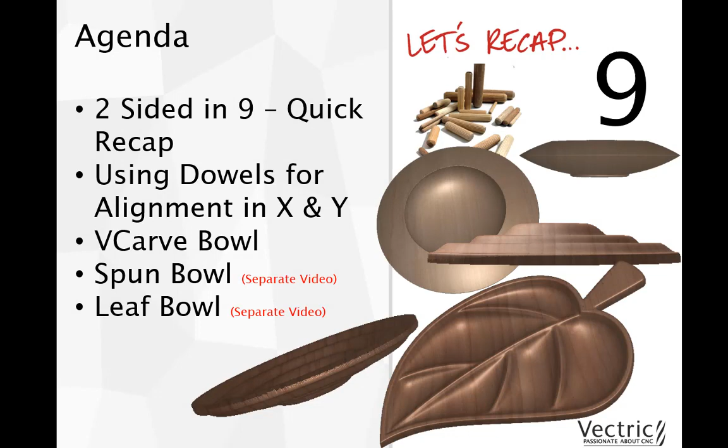So let's look at the important new features added to version 9 specific to two-sided machining. When you start a new session in the software, within your job setup form, you now have the option to select between a single-sided and a double-sided job. To create a two-sided part, you select double-sided, and then set up your job size as normal. The Z0 position can be selected for both sides within the job setup form.

As normal, we can set that from the material surface, the machine bed, or we could zero off the same side so we're referencing from the same face. Then we choose which way we'd like to flip our material over, so we can flip that from left to right, or we could flip that from bottom to top.

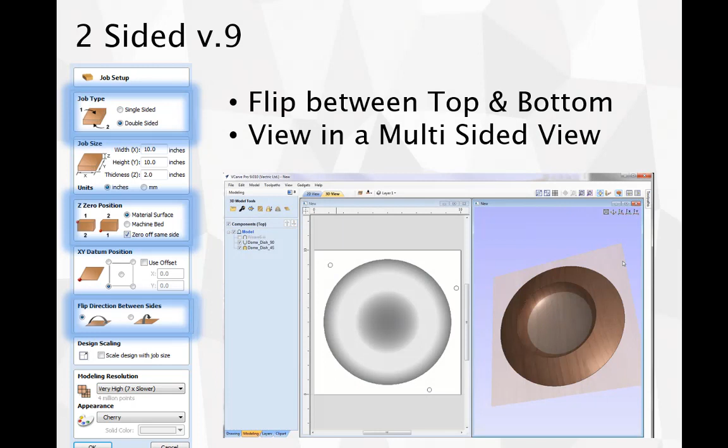Once we've entered all of the information within the job setup form, we'll then enter a new session, and it will look something like this. Here we have the option to switch between the top and the bottom, and if I click on that toggle button, you'll see that I'm now able to switch between the top and the bottom sides.

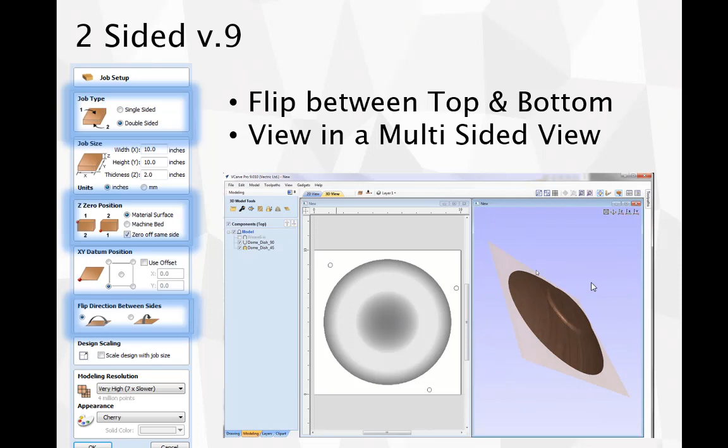In the 2D view, the bottom is represented with an orange ruler, so I know that I'm on the bottom side. We also have the option on the right hand side to visualize our part in a multi-sided view. When we click on this option, I'm able to view both the top and the bottom in the same session within the 3D view.

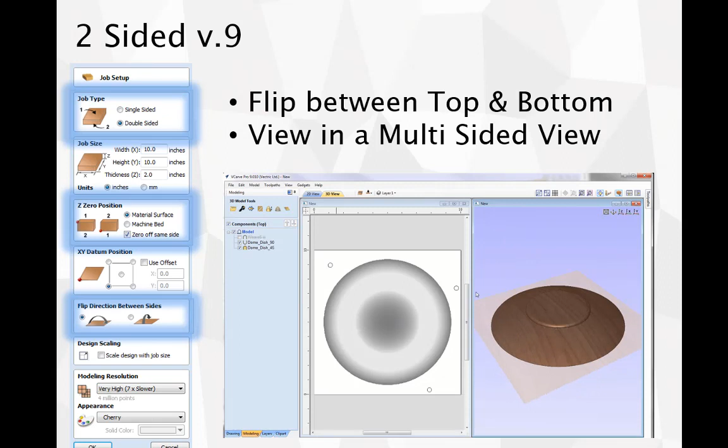So not only can I see the top and the bottom of components that I've assembled or modelled, but I'm also able to visualise the toolpath preview, both the top and bottom within the 3D view. Over in the 2D view, whilst we're in a multi-sided view, we're also able to visualise vectors that may be on the other side. All of this is very useful in that we're able to see everything that's going on both sides in one single session, so we're not left to do any guesswork.

All of this will be covered throughout the different examples we'll be looking at throughout this tutorial and the two separate bowls we'll look at separately. When creating a two-sided part, it's crucial that we have exact alignment between both sides in terms of their X and Y locations. There are many methods of doing this, but I'm going to go with a method I know is pretty fail-safe, and that's using dowel holes positioned in a random asymmetric manner.

So what do I mean? Let's say that you have your part in the job. You need to draw circles that are the same diameter as the dowels you plan to use, and then randomly position them around your part like so.

Then you're going to take your dowels and select all of them, where you'll use the right click option to copy to the other side. So when you flip the part over in the software to view the bottom side, you will see that the dowels have been positioned according to your flip direction that you set up in the job setup form.

And so there we have everything we need. We can begin to run the toolpaths. So your first operation here is to take the dowel vectors for the top side and partially cut into the top side of the material block.

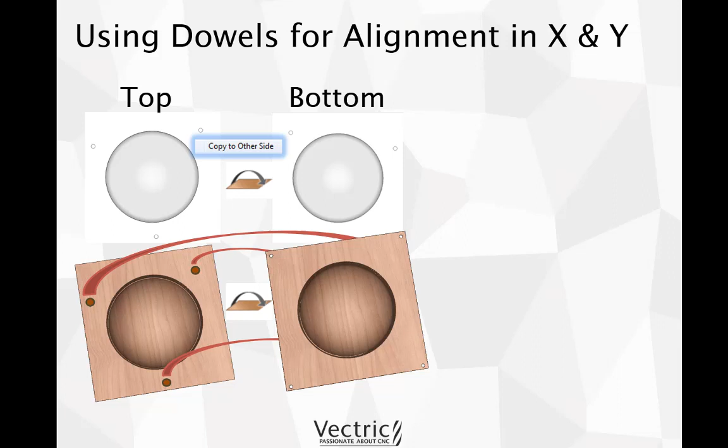So then we'd secure our part in place using screws or clamps, and then we'd simply run the other toolpaths for the bottom side. The benefits of using this asymmetrical dowel method means that I can cut our part in two separate operations, especially when we're dealing with 3D machining.

3D machining in a single-sided job can take quite a while to cut, and so having the ability to cut in two separate operations just makes life a little bit easier for me.

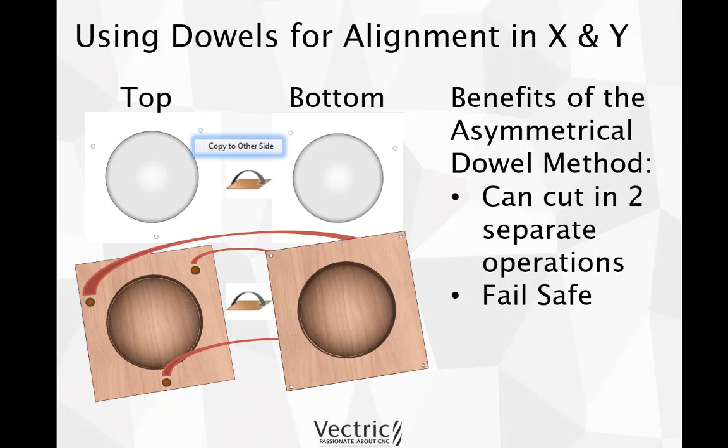It is also pretty fail-safe, as there's only one possible way that we could locate our part, so we don't get confused with which way we flipped our part over, whether that was in the horizontal or the vertical, as our asymmetrical random positioning of the dowels means there's only one way that we could ever locate the part.

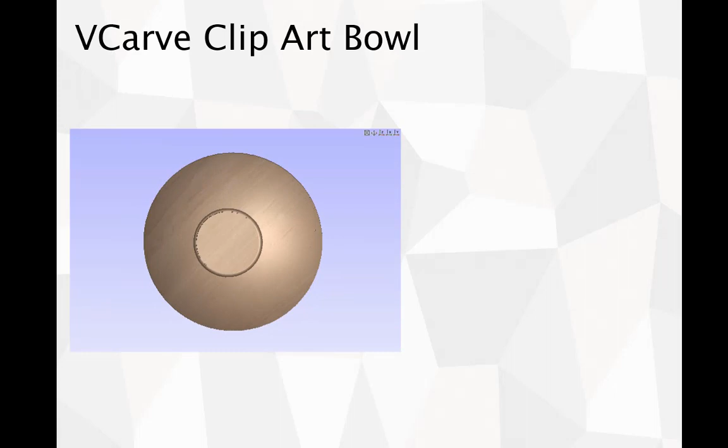So let's have a look at an example where we create a two-sided bowl in V-Carve. Here we're going to make use of the free Clipart that comes with V-Carve and assemble the Clipart to make a full 3D two-sided bowl that you can see here.

We'll look at how to add tabs to hold the bowl in place and run through the toolpaths to cut the part out. We'll then discuss how we could remove the cusping effect that may be left around the part due to the fact that we are using a round tool to finish the part, where only the centre of the tool will ever touch at 0.

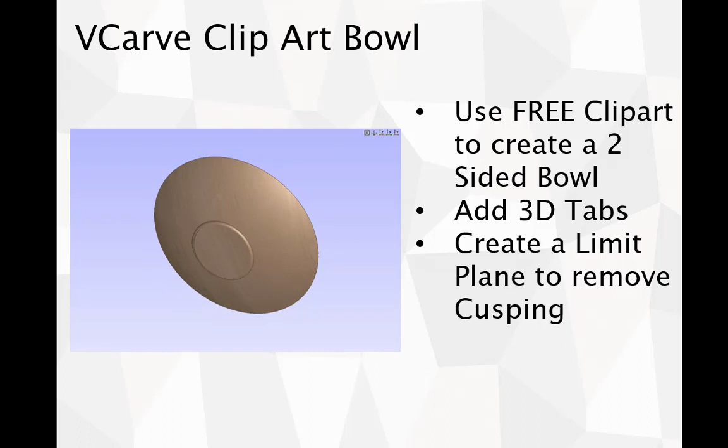And so we'll look at how we can create and utilise a limit plane with a negative base height to drop the finished tool below 0 to ensure that the cusping is removed. And then to finish, we're going to look at alternate designs.

So in the software, we're going to go and create a new file. Working with a double-sided job, here we're going to enter our job dimensions. Working with 10 inches for the width, height is going to be 10 inches, and our material thickness is 2 inches.

I'm going to set the Z0 position of the material surface for the top side. For the bottom side, I'd like to set our Z0 to the machine bed, so I'm going to zero off the same side, so we're referencing from the same face. XY datum position is in the lower left hand corner. We're going to flip that across the horizontal there, and then we could go ahead and press OK.

So I'm going to go straight to the modelling tab, just to organise my levels in advance. I'm just going to right click, rename that level. We're going to call this level the model level.

And then we're going to go into our Clipart tab, and I'm just going to locate my Clipart. So I'm looking at all of the Clipart that comes with VCarve here, and I've got a section here called domes and dishes. So here I've got a variety of different domes, all at different angles.

I'm going to take this one, 45-degree angle here, double click that to bring that into the centre of my job, and then I'm roughly just going to size that up. Okay, you might want to make that a little bit bigger.

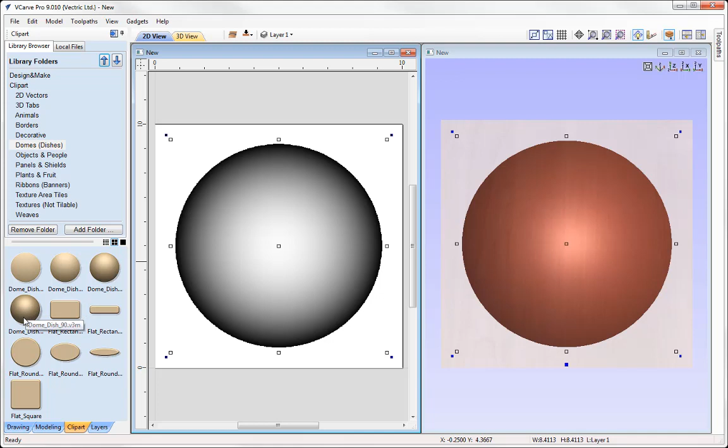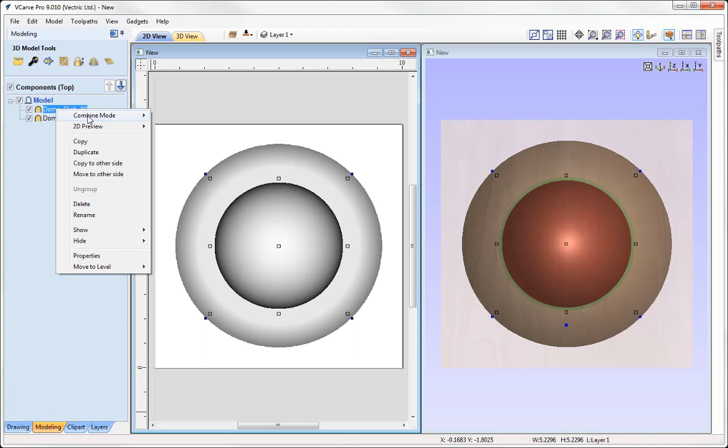We're going to look at this 90-degree dome dish. Let's double click on that. That's going to automatically put it into the center, and then we're just going to roughly position that. Okay, that might be a little too small. Something like that seems okay. If you go into the modeling tab, we're going to alter the combine mode of this component, setting it to subtract, so it's subtracting into our overall dome shape.

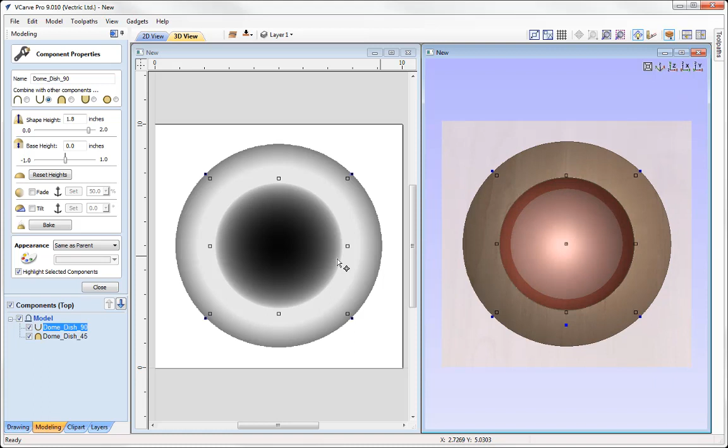With that component selected, let's go into the properties. I'm going to reduce this - it's a little too deep at the moment, so I'm going to set that to be 1.8. Press the space bar to enter that in, and we can see that has applied there. We'll just put that in the Z, and then close out of the dome dish properties. That is pretty much the model complete.

So what we need to do now is position our dowel vectors. If we go into the drawing tab, we're going to draw a circle using the quick keys. I'm going to drag to begin drawing a circle - I've measured my dowels and they are 0.33 of an inch. So I'm going to type in 0.33 and then D on the keyboard for diameter, and it'll instantly create that for me. Position there, and now that I've entered that in, the form has already updated, so I can just go around and click in position for the other dowels.

Okay, so that's okay. We can close that down, and we've got our dowels in place - that's pretty much the top side done. Now I want to take a copy of the larger dome that we've used for the top side of the bowl and send that over to the other side. I also need to send a copy of our dowels over to the other side also.

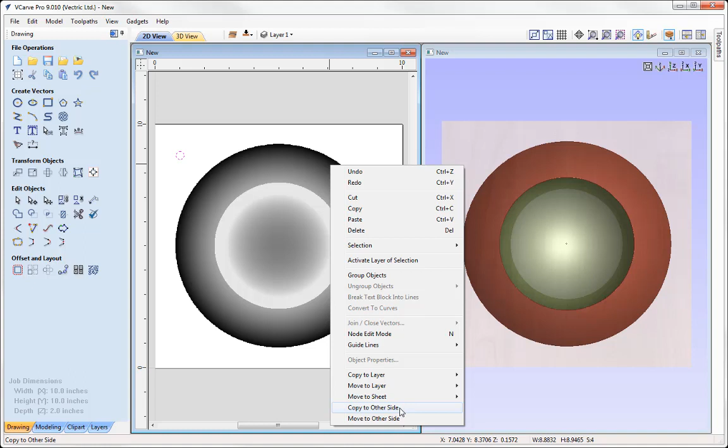So with that selected, I'm going to hold down Shift to select the other two dowels, and with Shift still held down, select the larger of the two domes. Then we're going to right mouse click and use this option to copy to the other side. That's going to send those vectors along with that component over to the bottom side. Now when I come over to toggle between the top and bottom, if I click on that, I can see we're now on the bottom because my ruler is displayed as orange, with an arrow pointing at the bottom side of my material block.

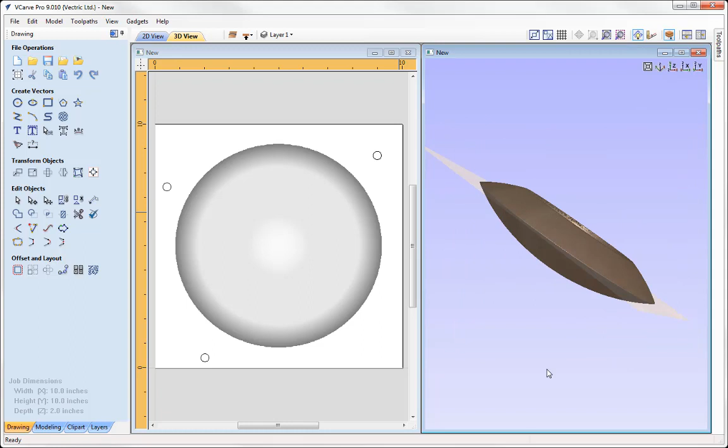I can see my dowel positions have been mirrored over, and I have my component there. We are looking at this in a multi-sided view, so when I come into the 3D view, I can see the whole part, and everything is aligned correctly - that's because the software has done that for me when we copied everything over to the other side, based on the flip direction going from left to right. So let's just put that in Z.

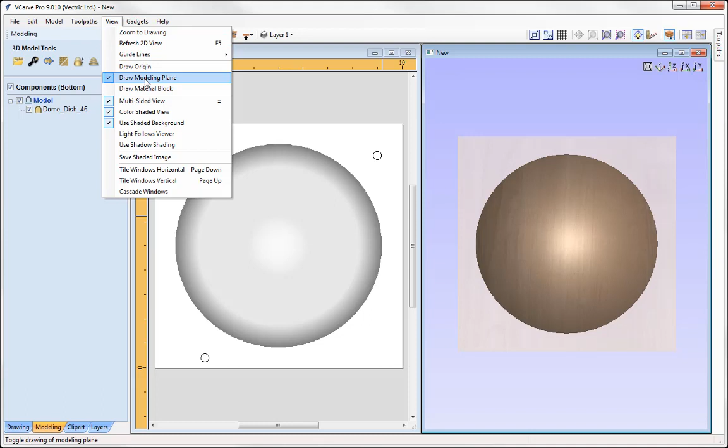Let's go into the modeling tab again to keep organized. I'm going to right click and rename that level - we're going to call this level model. If we take a look at our model, if I just go to view and temporarily draw that modeling plane so we could visualize our part as if it was actually sat on, say, a countertop, we'd see that our bowl will just constantly be wobbling around because it has no flat bottom.

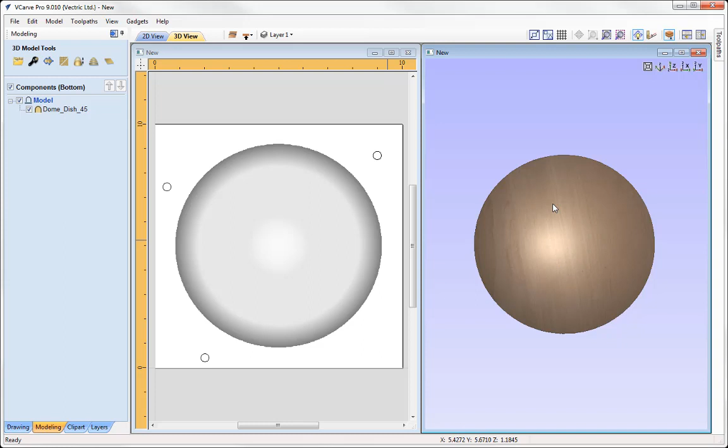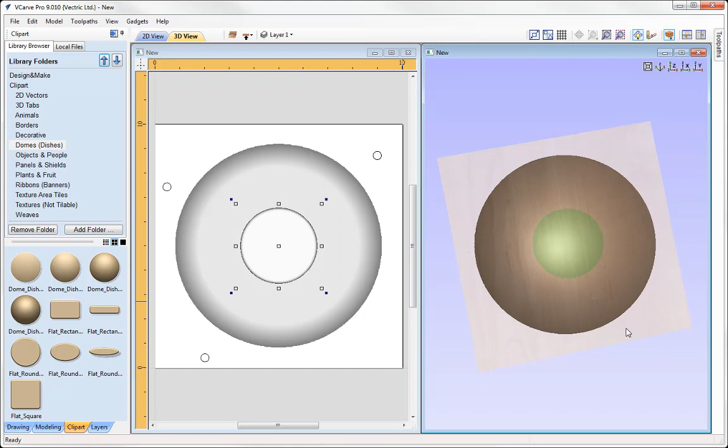So I need to implement something that's going to have a flat area in the bottom side of our bowl. To do that, let's go back into our Clipart tab - we can see here that I have a flat round circle within the domes and dishes section. I want to double click to bring that in, and it will again put that into the center. Just going to make that a little bit smaller, like so. We can see it's currently being obscured by the height of the big underside dome of our bowl here, so what we need to do is just look at the properties there.

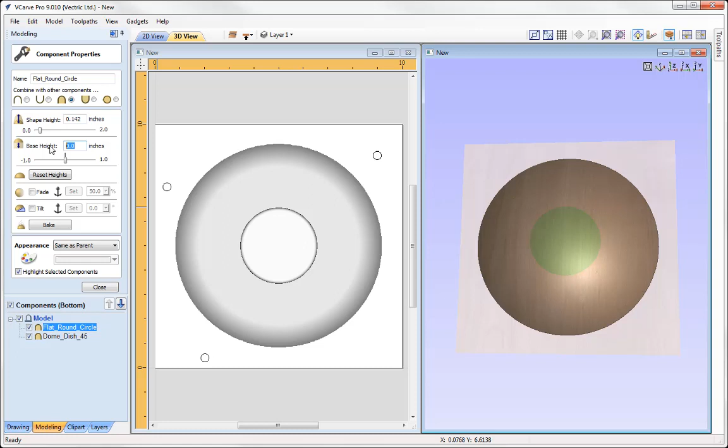So with that component selected, go into the properties and we're just going to adjust the base height. If I run my cursor over this area, I can see it's currently at 0.0. Let's have a look if we add in a base height of 1 inch, press enter to enter that in. We can see that's just about coming through, so let's try 1.2.

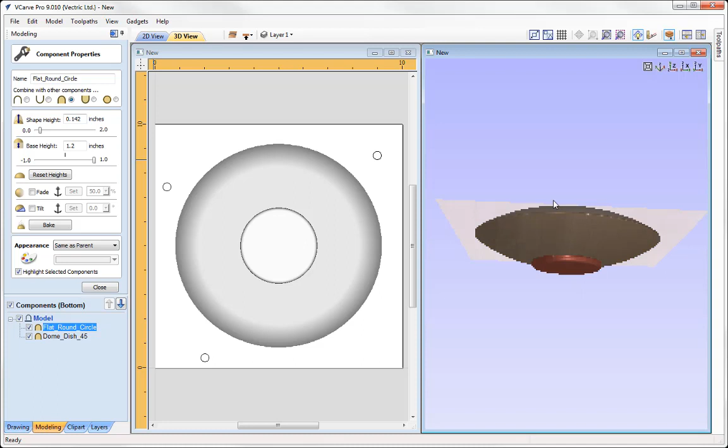And there we have a nice flat bottom there. So now when my bowl is sat down on a side, it's just going to sit nice and flat thanks to this flat bottom that we've just added.

So we're almost ready to go to the toolpath side of things. Before we do that, we need to ensure that our bowl is going to be held securely to our material whilst we're cutting both sides. And so to do that, we're going to look at adding in 3D tabs.

Let's go over to our component tree. I'm going to right click on the model level and insert a new level. Right click on that level, we're going to rename this one to tabs. Then we're going to right click and set the combine mode of this to merge, so any tabs that I add into this level will blend in with the actual composite model that we've got here.

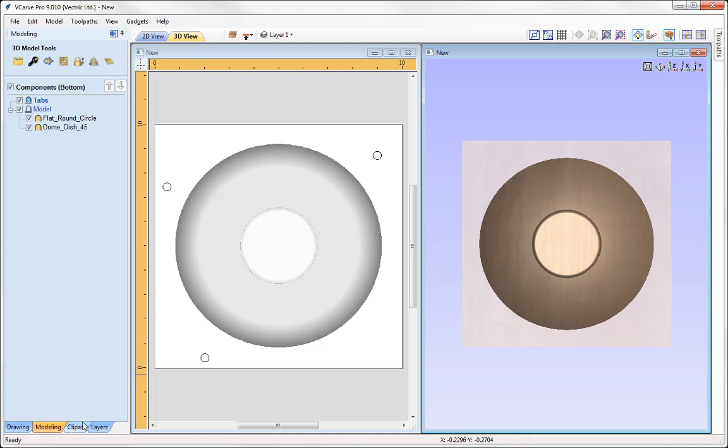Let's go to our Clipart tab. We have a folder dedicated for 3D tabs. You'll see we've got 3 new pieces of clipart, and we've got this underscore rectangular one. I'm going to double click that to bring it in, so it's just a rectangular tab.

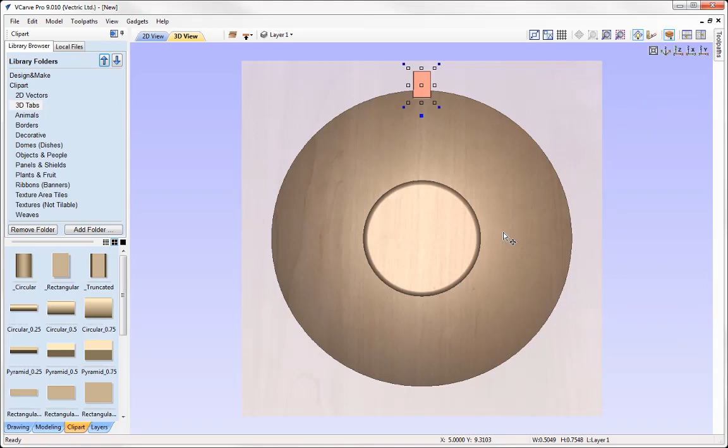I position that along the centre at the top there, and if we go into the 3D view, we can see that tab. We can check the height of that, a quarter inch. That seems pretty reasonable in this case. I'm just going to drop that down a little. Okay, that's okay. So now we could look at adding more tabs.

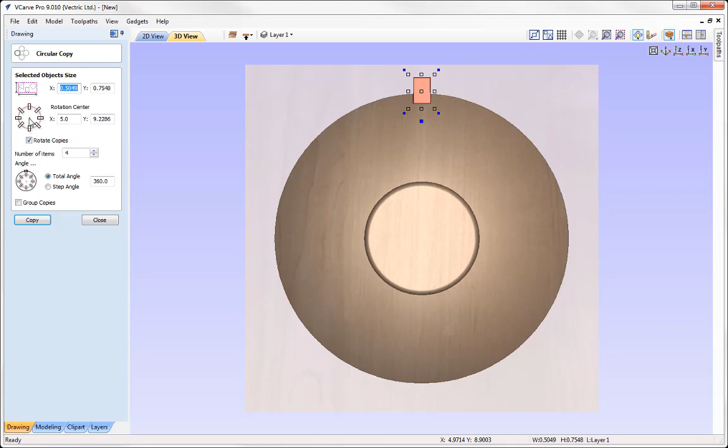I could just go in and position them, or I could just let the software do that for me by selecting that component there, and then we're going to go into the drawing tab. I'm going to use the circular copy tool. We're going to make sure that our rotation center is in the center of our job. If we take a look, when I double click on the center here, you'll see that rotation center has been pulled up to the center of our job, and our part will be rotated about this point.

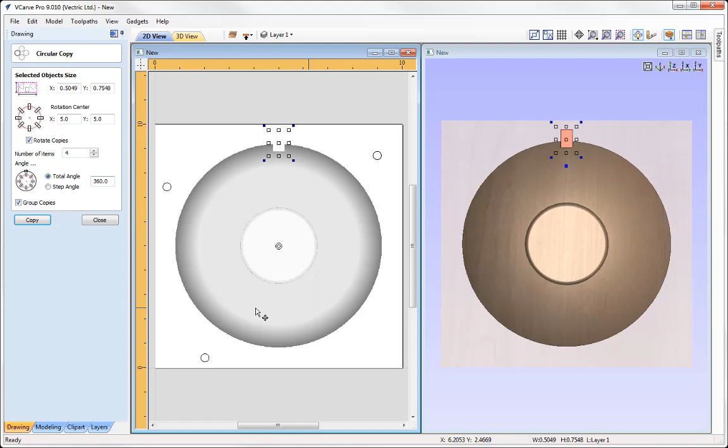We want 4 copies, and we want to rotate those copies, and then we'll group them once we've created those copies. So let's press copy, and there are the 3 other tabs that have been positioned around the outside of our bowl. If we go into the Modeling tab, we can see that they've been grouped because we chose to do so in that form.

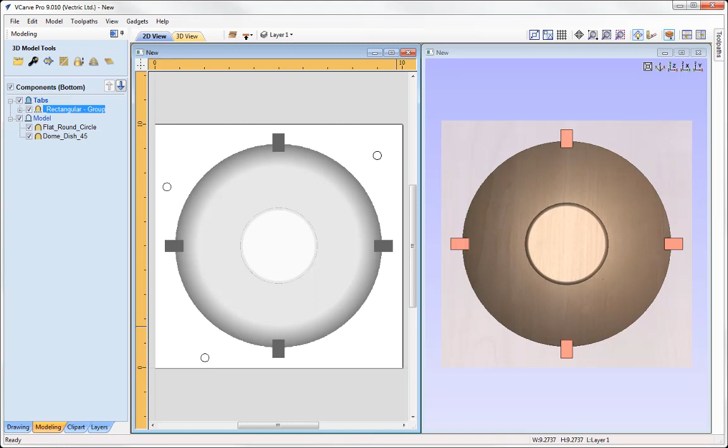So now we have everything set up ready for us to run our toolpaths. Let's switch back to the top side, and then we're just going to switch over to the Toolpaths tab. So first and most important, we want to go into our material setup.

So here we just want to check over a few things. Material thickness is 2 inches, XY datum position is going to be set to the lower left hand corner. We're going to set the Z0 on the material surface for the top side. Model position in the material - you can see we currently have an error in that our model thickness actually exceeds our material thickness. So we're just going to tweak that.

I do have a little bit of room just to shrink that down, and I'm sure it won't cause too much of a change in terms of the way that our bowl looks. So let's use the set option there. Here I'm just going to go for 1.8, press apply, and then we'll just simply close that down, and it's been updated there.

And then I'm going to position the model in the material so it's in the dead center of our material. That way we have material above and below, so this can just account for any discrepancies in the actual thickness of our material there.

Check over your rapid Z gaps above the material, clearance plunge, and your home and start position, and then once I'm happy with everything, I'll press OK. And so your first operation here is to take the vectors that represent the dowel holes.

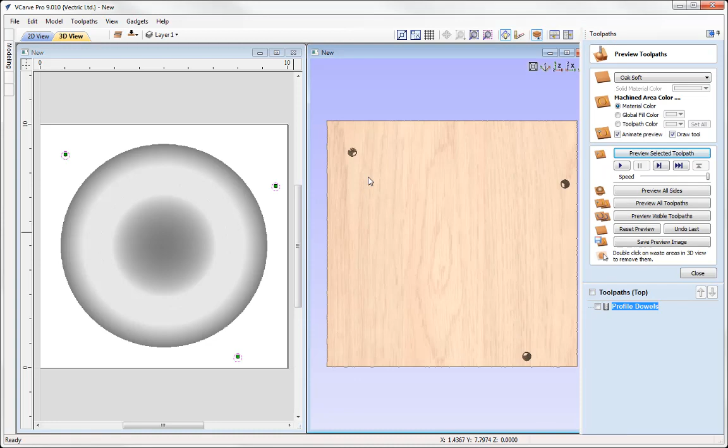I'm going to go into the profile toolpath. We're going to cut partially into the top of our material block, with a start depth at 0, the top of the block, and cut down 3/4 inch into the material. I'll use a 1/4 inch end mill, select it, press OK, and machine on the inside of those vectors. We'll call that one Profile Dowels. Simply press calculate, preview that, and we can see those dowels in position there. Okay, let's close that down.

Now we're going to look at our 3D toolpaths. We're going to go into the 3D roughing toolpath here, using the 1/4 inch end mill. You can use the edit option just to check over the settings, ensuring that they're safe and appropriate.

Then we move on to the machining limit boundary. In this case, I'm going to select the model boundary, so the tool will look at the model it can see and use that as its boundary to define the roughing toolpath. I'll put a little offset in there, same diameter as the tool, so it comes past the edge of the part by 1/4 inch. Machine allowance will go with 0.03, so just a tiny bit of skin will be left on our part for our finish tool to come out and finish that up.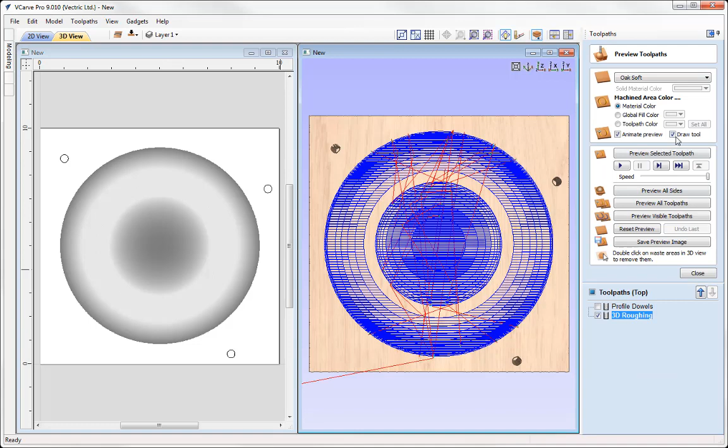Roughing strategy, we're just going to do a basic Z-level strategy where we raster in the X-axis, and we'll call that one 3D roughing. Press calculate, the software will calculate that for us, and then we can preview that part and see all of those steps there. Okay, so that looks pretty good.

So we've hogged out all of the large parts, and now we could use a smaller tool to get in at all of the finer, smooth detail that we can see here. So let's go into the 3D finishing toolpath.

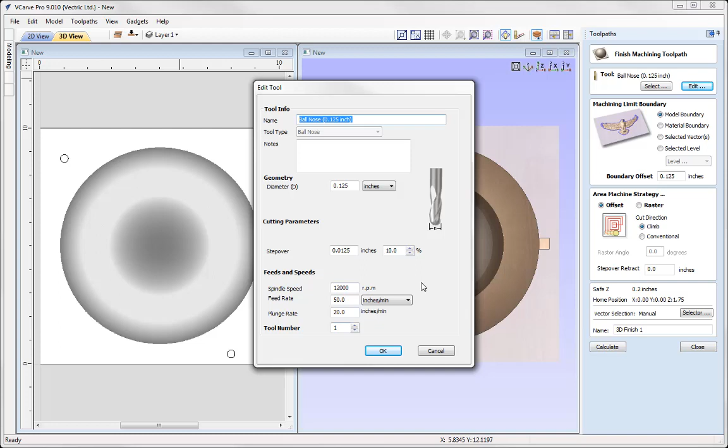Here we're going to use an 1/8 inch ball nose. I'm going to use the edit options to check over the settings there. Okay, step over of 8 to 10% seems reasonable. Go ahead and press OK.

And here again we're going to go with the model boundary. I'm going to go with an offset, using the same diameter as the tool. I'll apply an offset strategy as it's a rounded shape, going round and then moving on to the next contour and going round again. As I'm using that offset strategy, I'm going to help myself by adding a step over retract of 0.02, which will help eliminate tool markings as the tool travels from one contour to another. The tool will actually lift, travel to the next contour, and drop down, so it won't create the tool marking line you commonly see when using the offset tool on rounded parts.

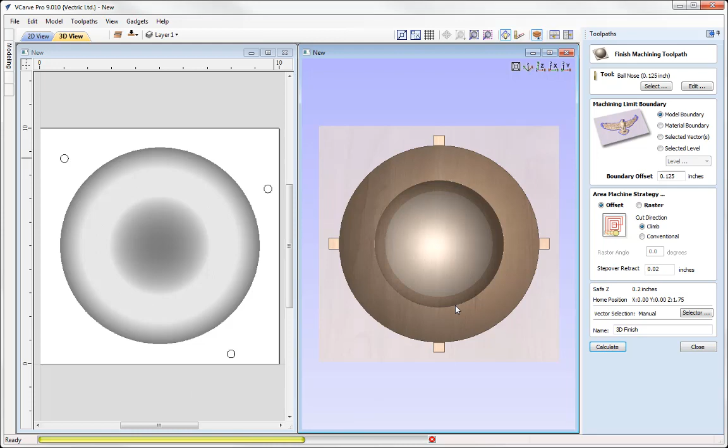So here we're going to give that a name, we'll call that one 3D finish, and then simply press calculate, and the software will take a moment to calculate that for us. Then we can preview that in the preview toolpaths form. Perfect. Okay, so I like what we've got there. We've got a nice dish in there, and we can see how our part would look if we cut that out on our CNC machine.

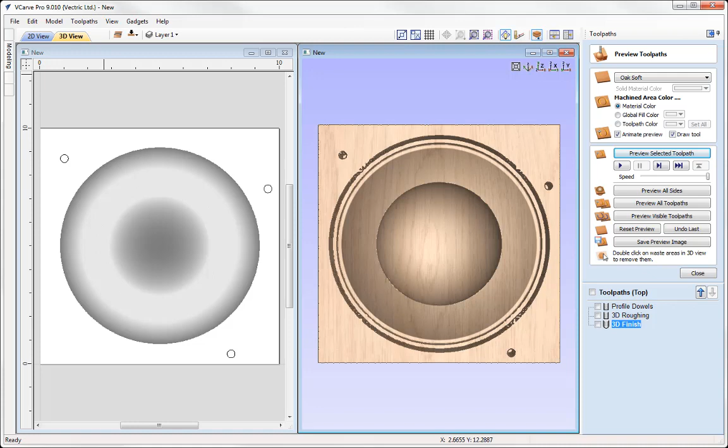So now we can switch over to the bottom side. Let's come over here, close out of the toolpath preview, and go to the bottom side, where you'll see now that we can enter in toolpaths for the bottom side. So as always, let's just have a glance over our material setup.

I can see straight away that our Z0 has changed, and it's now zeroing off the machine bed, because I set that up to do so in the job setup form right at the start of our job, which ensures that I'm referencing from the same face that we've just cut from. Okay, so we've got thickness, XY looks correct, model position is still in the centre there, perfect, and everything else looks okay here, just checking over to ensure everything looks correct.

For our first operation we're going to take those dowel holes. What we would have done is take our material block off of our machine bed, and now our first operation here is to run the dowel holes for the bottom side directly into the spoil board so that we can create location holes for when we flip our material over to ensure correct alignment within our X and Y positions.

With those vectors we're going to go into the profile toolpath form. The start depth for this, I'm actually going to enter our material thickness, so the tool drops down by the thickness of our material, reaching the spoil board, and then we can cut into the spoil board by 1/4 inch this time. We'll use a 1/4 inch end mill, machining on the inside.

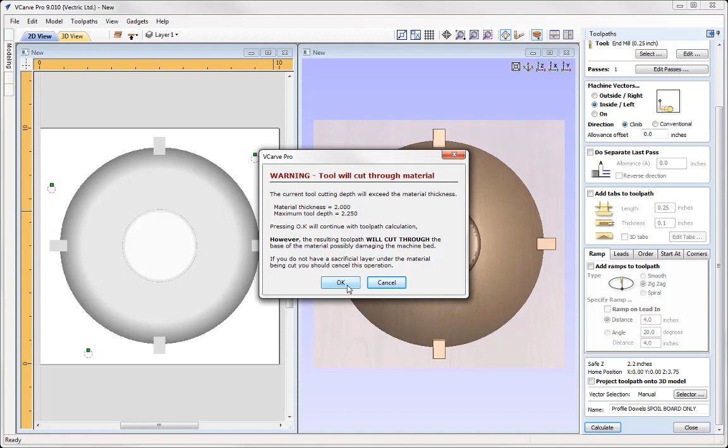We'll give that a name - we're going to call this one profile dowels, and just to remind myself, spoil board only, so we're not cutting into our material block here. Press calculate. The software is going to warn me that we will cut through our material - that's okay, that's what I intend to do, so I'll go ahead and press OK.

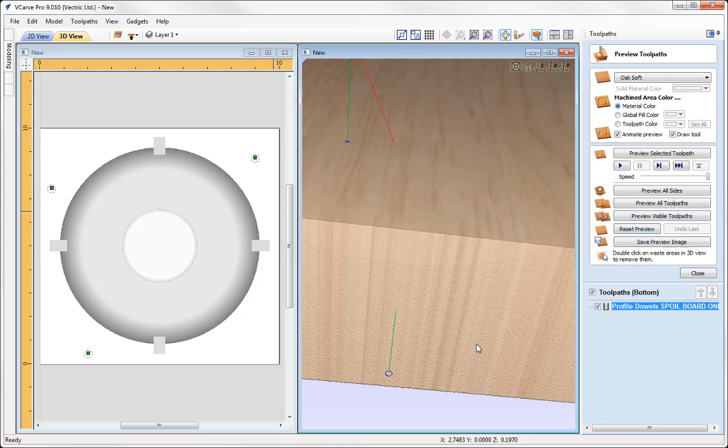Just so you can see what's happening here, the tool is coming over. It's going to drop down to 2 inches, which is the material thickness, though we won't have our material thickness in place there, and then it's just going to cut in 1/4 of an inch. We're not actually going to preview that because we're not cutting into our material block - this will be cut into our spoil board. Let's close that down, and then we'll just undraw the visibility of the profile dowels toolpath.

Now we can look at running our 3D toolpaths. Let's go into the 3D roughing toolpath. Here again we're going to use a 1/4 inch end mill. For the machining limit boundary, we're not actually going to select the model boundary this time - if we did that, let's just take a look.

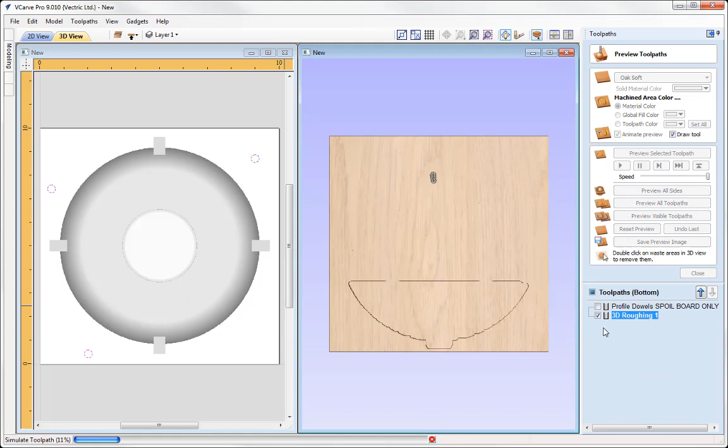So just calculate that and then preview that - you'll see that we'll actually cut our tabs out of our material block. We don't want to do that. We need to keep our tabs intact to our material block to hold our bowl in place. So let's just use the undo last option.

I'm going to go back into the roughing toolpath, and this time we're going to look at using the selected level. If I just open up the modelling tab over on the left here, you'll see we have a level called model that has our bowl in place, and then we've got a level called tabs. So what we can do here is specify to use this selected level - we want to use the model level as our boundary. It's going to take all the components within this level and use those components as the boundary for our toolpath.

What it also does is accommodate any models that lie within that boundary, so for instance it will include the tabs that we've got here, and that will ensure that we don't cut the tabs away. Using the selected level for the model, these components here, we'll put in an offset so it cuts past the part by 1/4 of an inch - you're going to see the toolpath cut past the bowl by 1/4 inch, so we'll see quite a bit of our tab sticking out there before it goes into our block of material.

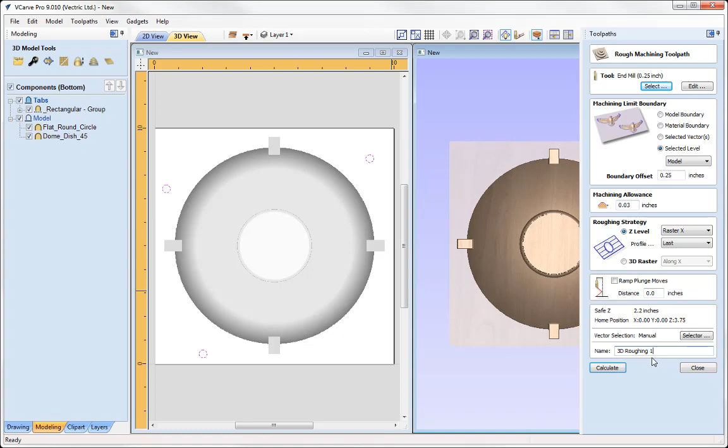Machine allowance 0.03, and we'll do a Z-level strategy. We'll call this one 3D roughing and press calculate, and we'll just move that over so we can see it, and then we can preview that toolpath - you can see straight away that our tabs are still connected to our block of material thanks to the option to use the level as our machine boundary.

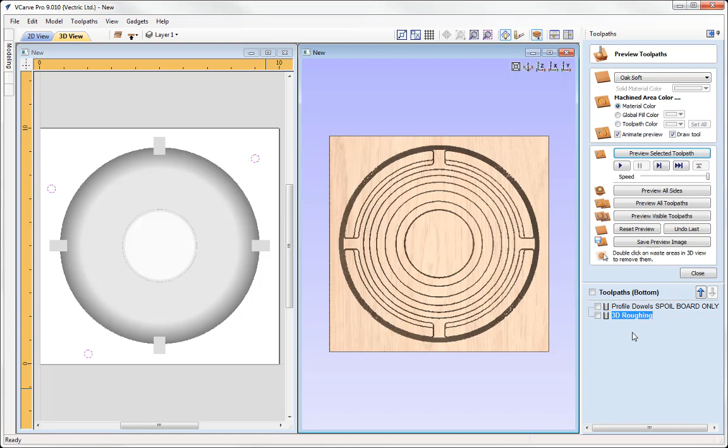Perfect, so let's close that down. We're going to go into the 3D finish pass. We use an 1/8 inch ball nose in this case. Again, we're going to use the selected level, the model level, with an offset so it rolls past the part, and use an offset strategy, and again we'd like to apply a step over retract of 0.02. Call that 3D finish, press calculate.

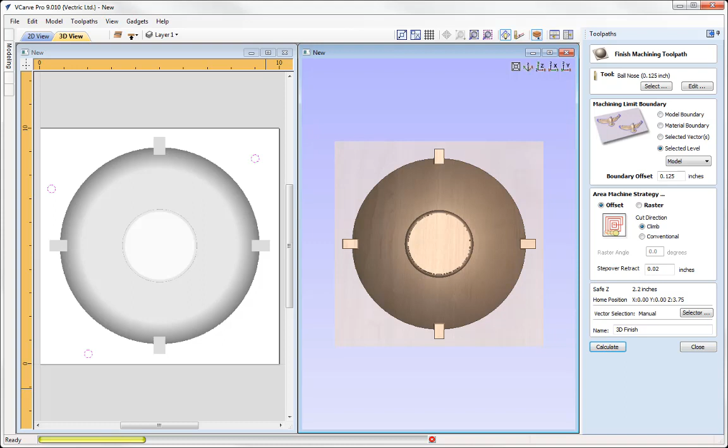It's just going to take a moment to calculate that for us, and then it will open up the preview toolpath form. We can preview that toolpath and see the result of that finished pass, and we can see our tabs are still held securely into our block of material so the bowl won't fall out.

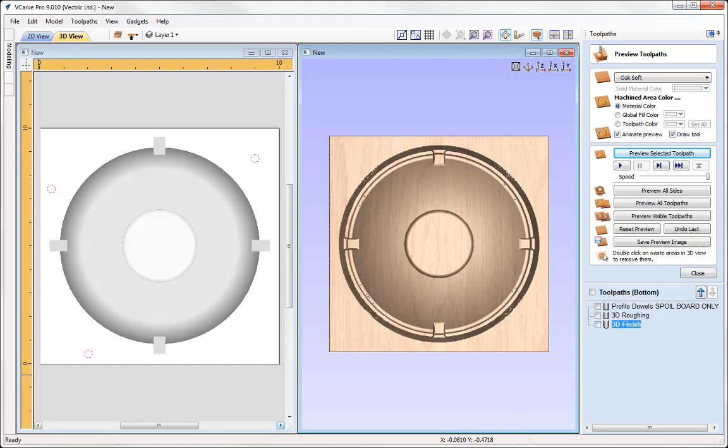Let's maximize the 3D view and take a look at our part so we can see the two sides. We can see we're not actually cutting all the way through, and what we're actually seeing here is the result of using a rounded tool to cut our part out, and only the center of this rounded tool will ever reach zero.

So we're left with what we call this cusping effect, or a seam that you'll be presented with around your part. To eliminate that, we could look at applying a limit plane where we drop the tool down past zero to ensure that we cut away the cusping.

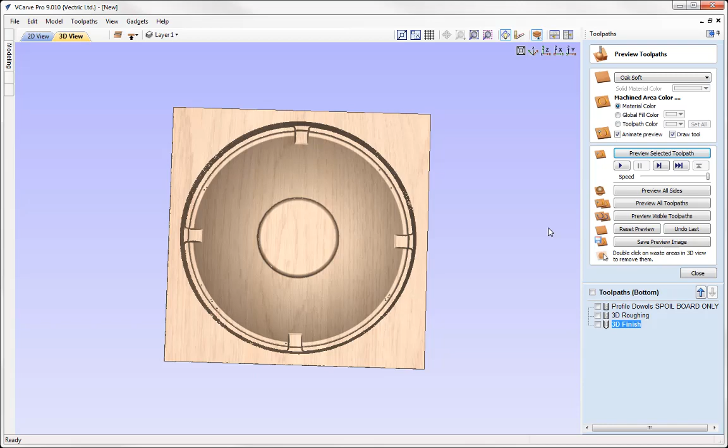Let's put that in Z, and we're going to switch back over to our modelling tab here. Within the model level, I'm going to right click to insert a new level, right click to rename that level, and call this one Limit Plane. I'm going to set the combine mode of this to merge.

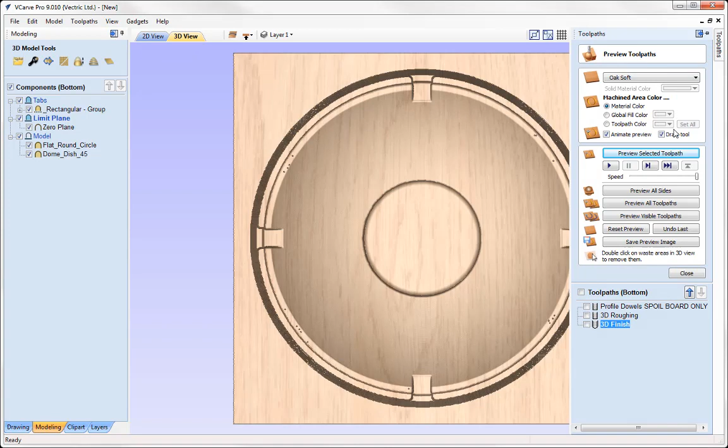So go to the combine mode, set it to merge, and then I'm going to create a zero plane that's going to sit there. Quickly coming over to the toolpaths, I'll close out of the toolpath preview. Then with our zero plane in place, I'm going to go into the properties and look at the base height.

Here I'm just going to drop the base height down by, say, the diameter of the ball nose that I'm using, so 1/8 of an inch there. And we'll close that down.

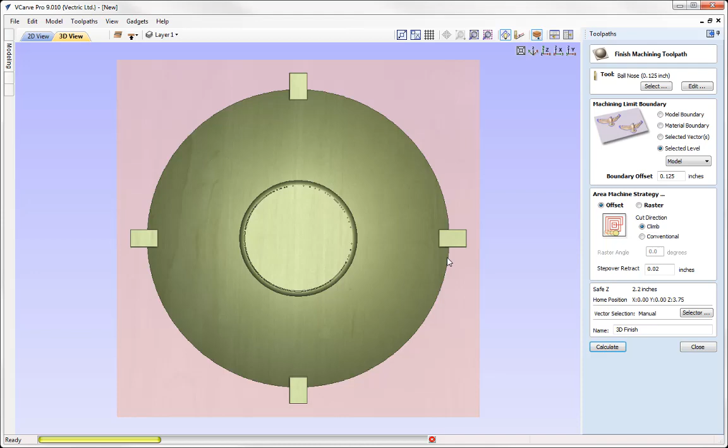Okay, so now that we've got a zero plane that goes below zero, when I recalculate my finish pass, it will accommodate that new plane and the tool will drop down past zero by 1/8 of an inch, and we should see that we actually cut through there.

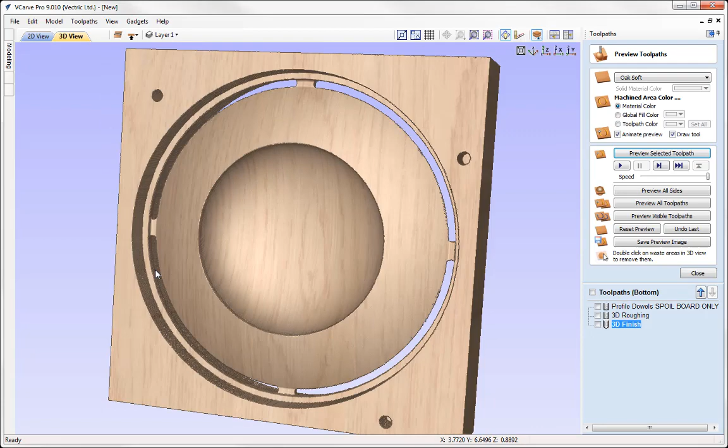So if we preview that, you can see we're actually cutting through our part, and that will eliminate the cusping effect that we may have on the edge of our two-sided part. And there is our finished bowl. So let's just put that back in the Z view.

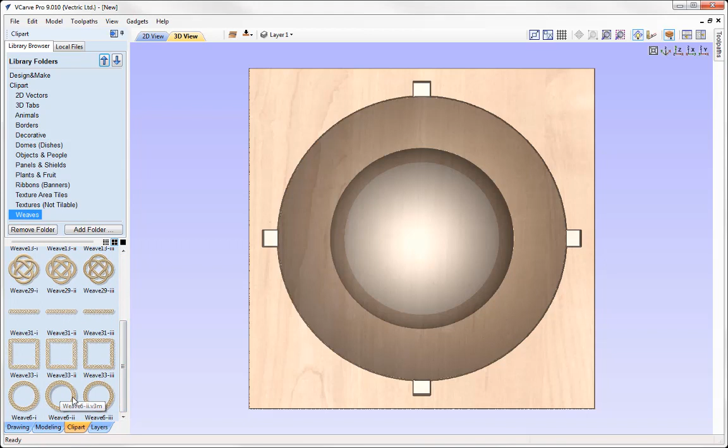So what we've created there is quite a basic bowl using the Clipart that comes with the software. We could look at alternate designs for our bowl. For example, we go to our Clipart tab on the bottom, and we could go into the decorative section or even the weave section, and here you can see I've got a series of circular weaves.

I could double click on one of those, and that will bring that into the center, and I could just bring that out into the modeling tab. I'll set the combine mode of that to add, and there we have a nice woven pattern that we could then go ahead and recalculate our toolpaths to include.

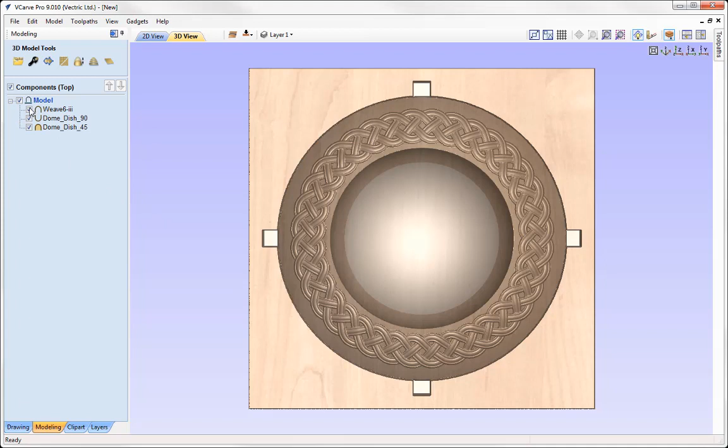So that's one idea. Another idea is to look at applying a texture toolpath to the rim or the edge of the top surface of our bowl. So let's have a look at a technique that will enable us to use a texture toolpath to go around the edge rim of our bowl.

So I'm going to tile our windows. I'm going to go into the drawing tab and draw a circle. I'm going to find the centre point of my job, and just roughly sketch in a circle. Just click on the actual grayscale so I can see where that is.

Okay, that's not too bad. I might make that a little bit bigger. We're just going to bring that out, and then simply offset that outwards by 1/8 of an inch, using the select new option every time. I'm just going to offset that out so it covers the majority of the rim there.

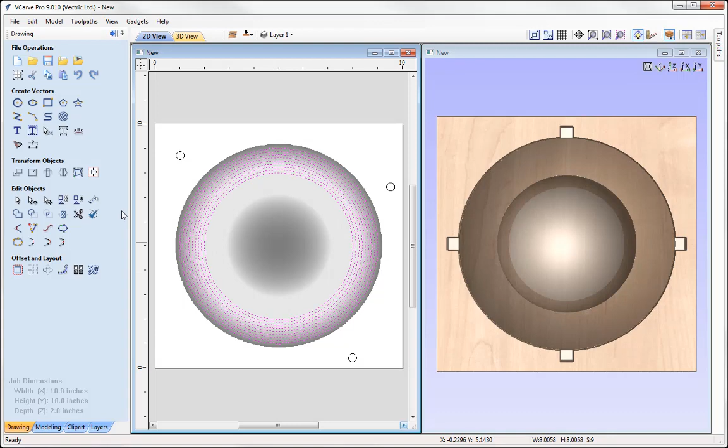Perfect, so let's close that down and take all of those vectors and go back over to the toolpaths tab.

I'm going to go into the texturing toolpath. Here we're going to select our ball nose, going with an 1/8 inch ball nose. Could use a V-bit if I wanted to. I'm going to use the selected vectors as a pattern and just go with some random settings here.

Max cut depth of 0.2, minimum depth of 0.1. And I'm going to make sure that I project that toolpath onto our 3D model there so it follows the contours of the actual bowl.

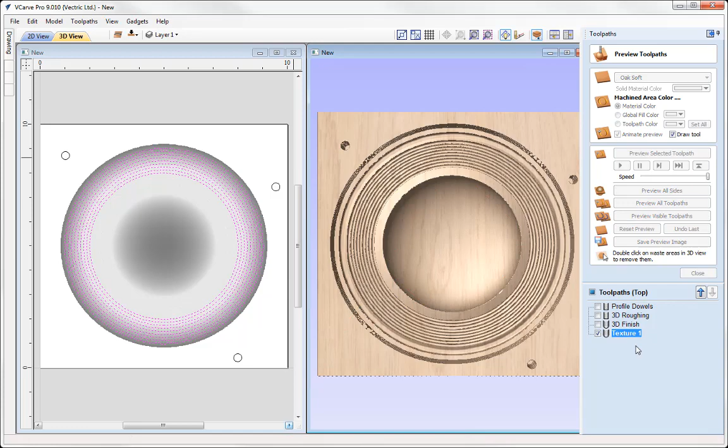I could go ahead and calculate that, and then we could preview that toolpath, and we can see that we've just got a very basic part there. It doesn't look too bad. It's not really the effect that I was after, but it does look quite nice, and I could go ahead and cut that as a different variation.

The effect that I was looking for was more of a varied effect where the tool would drop in and out, going all the way around the vector. Now, in order for me to do that, I actually need to break up these vectors into lots of individual vectors. Okay, so let's have a look at how we'd do that.

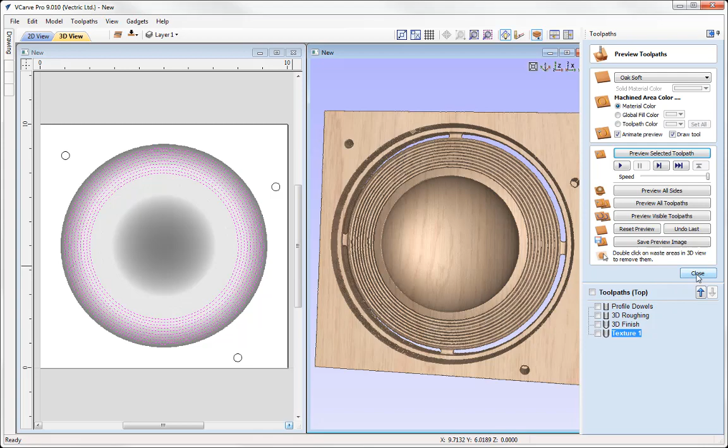So we'll just close out of the toolpath preview, and we'll come over here, and if I just take one of those vectors and go into the node edit mode, you can see that this vector is made up of 4 spans. Now I like to add in lots more nodes into each of these circles and then break each of those nodes up, so we're left with lots of tiny spans that we could then apply to the texture toolpath so we can create variation in the actual texture itself.

So one way of doing this, and an interesting way, is to take all of the vectors there, and we're going to use this option here to fit curves to selected vectors. Normally we only ever use this to smooth out our vectors by using the Bezier curves option. Well, in this case we're actually going to choose the fitting type to be straight lines, so we're going to want to create lots of straight lines within each of these vectors.

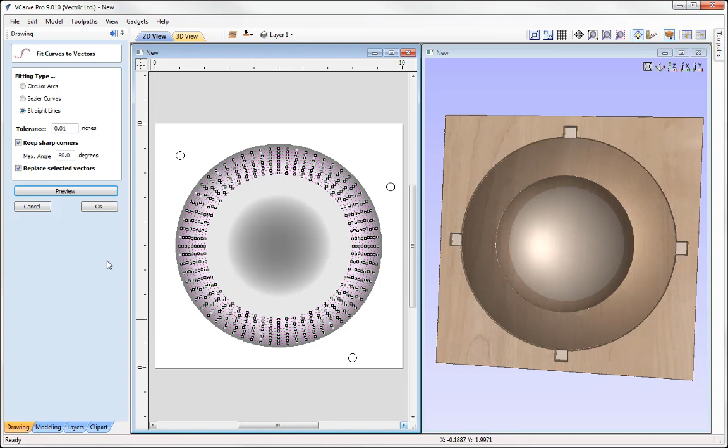I'm going to use the option to replace the selected vectors, preview that, and we can see we've got lots of different straight line spans there. Perfect, that's exactly what I want.

And so now I need to cut them up. So if I go to Node Edit, I could go in and individually cut each one of those nodes, but that's going to take me ages. What I could do instead is look at the new gadget that was added to version 9.

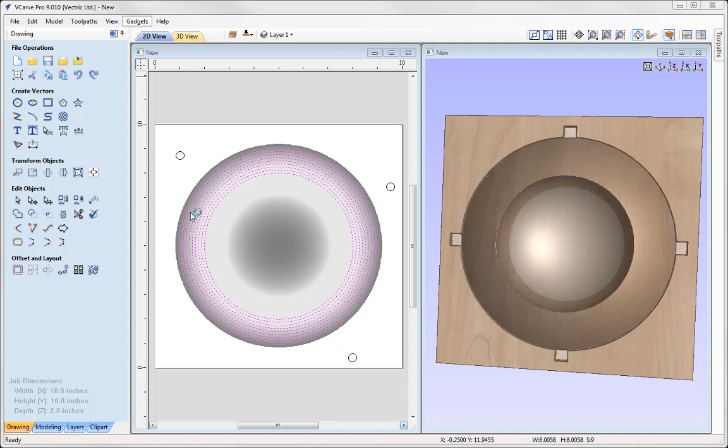I'll select all of those vectors, go into my gadgets, and here we're going to go to the Explode Vectors option. Now if you are using VCarve Desktop, you won't have access to any of the gadgets here, so this is purely a VCarve Pro and Aspire only feature. We're going to use the Explode Vectors gadget, and that's essentially going to explode those vectors up into their individual spans.

So here we're going to replace the currently selected vectors, check that box, and we want to put them all on a brand new layer, and the layer name will be called Exploded Vectors by default. Let's go ahead and press OK, and now you can see that when I select each one of those areas on the circles, we actually have lots and lots of different individual spans, and that's exactly what I need there to run my texture toolpath.

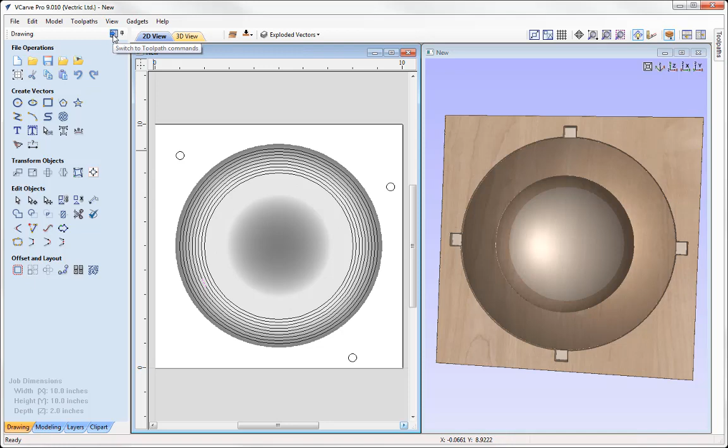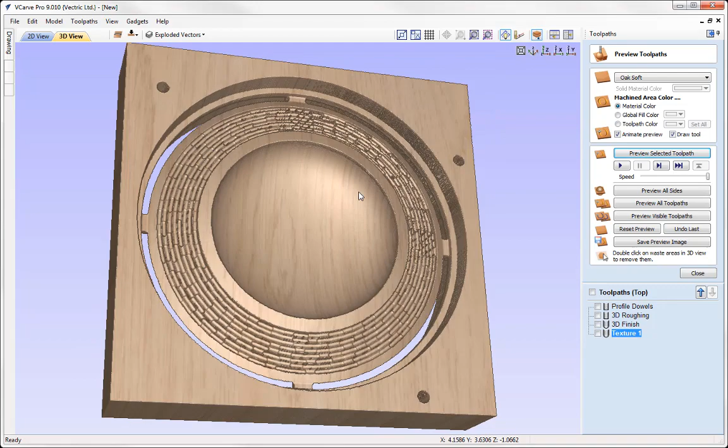So let's just go and switch over to the Toolpaths tab, and we're going to go into the texture toolpath. I can see that all of my vectors are selected here. I can simply go ahead and calculate those, preview that, and you can see we've got much more variation there. I like the look of the part, that looks pretty neat. So that's just another way that you could essentially decorate the bowl if you was creating this.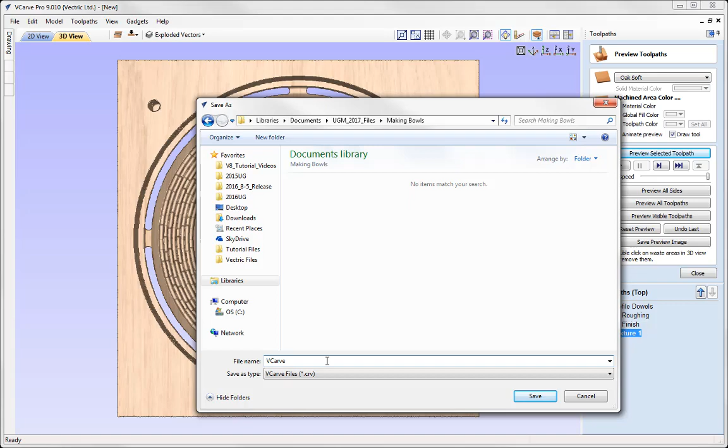So let's go ahead and save this file. Go to File, Save As, and in the project folder for making bowls, we're going to call this one VCarve Bowl, and then simply press Save, and you can access that from the project folder.